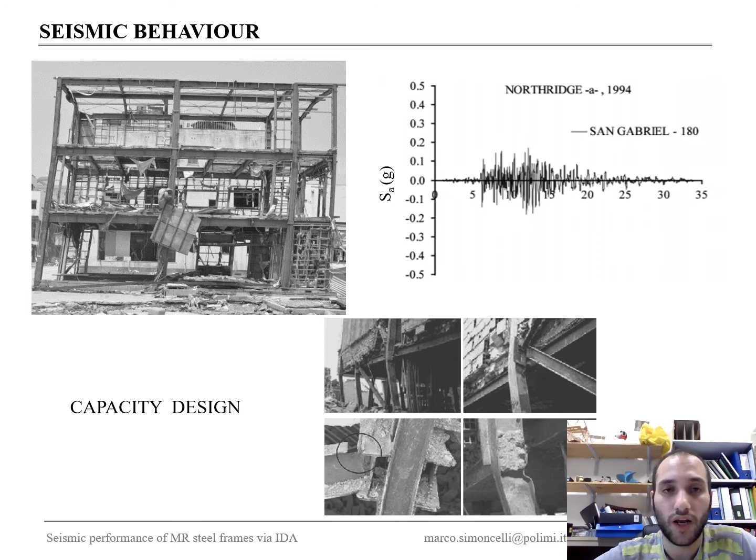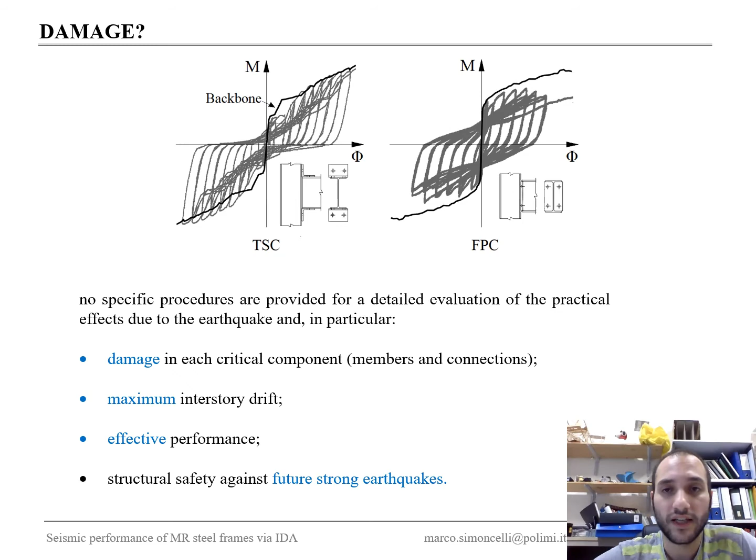The problem is also nowadays that the damage in the connection is not treated as deeply as the problem of the other members. So we need a procedure that is able to understand the development of the damage in the connection during the earthquake, and which gives us an idea of the situation of our steel frames after the earthquake. So for this reason, with this presentation, I introduce two concepts, that is damage estimation and residual load carrying capacity. The procedure herein presented is based on the incremental dynamic analysis.

The incremental dynamic analysis is a well-known procedure developed about 20 years ago and is based on time history analysis. On the base there is the running of several time history analyses with different signals, with different accelerations, by increasing each acceleration by a scale factor from 0.1 to infinite, theoretically. So, if you look at this flow chart, we started with these 44 earthquakes, and for each earthquake we increased the factor from 0.1 to 8 as maximum, until the collapse of the frame.

Collapse means instability of the frames, evaluated when the convergence of the analysis is not reached, because the frame in the software was modeled with plasticity in members and plasticity in joints. The new concept associated with the incremental dynamic analysis is the estimation of the residual drift, so not only the transient drift, the damage in the joints and in the elements, and the concept of the residual load carrying capacity.

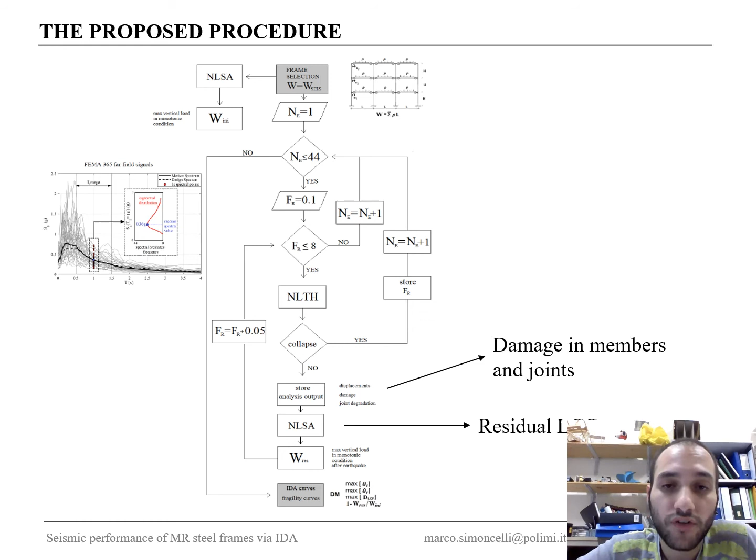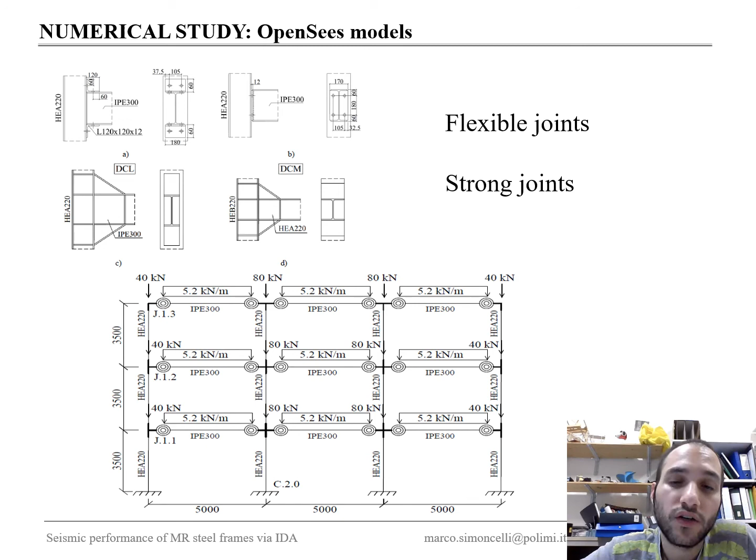This is the frame that was considered, 3 bay and 3 floor steel frames, and 4 cases were considered, 2 cases with quite flexible joints, and 2 cases with very strong joints, to see the differences between these two extreme situations. All the models were developed in the OpenSees software with second order effects, and all the joints and the nonlinear behavior were calibrated with experimental tests.

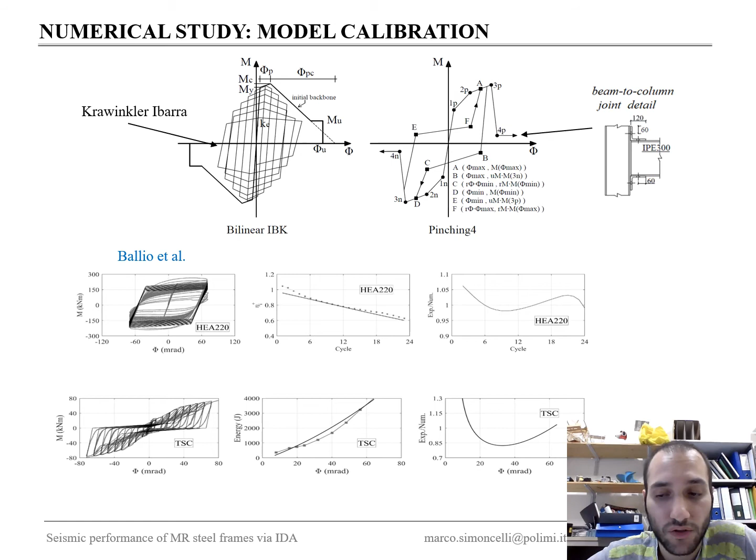So we started with the experimental cyclic tests of Ballio, and we calibrated the Krawinkler-Ibarra model for the members and the pinching models for the joints, especially the flexible joints. You can see here the very good agreement between experimental and numerical reproduction of the cyclic behavior of these elements.

For the damage estimation, the low cycle fatigue theory has been used. So the Miner rule combined with the rainflow method has been used to understand the accumulation of the damage cycle by cycle in the joints and elements. When the final value of damage is 0, it means no damage. When it is 1, it means full damage, so collapse of the element due to damage. This is the low cycle fatigue theory.

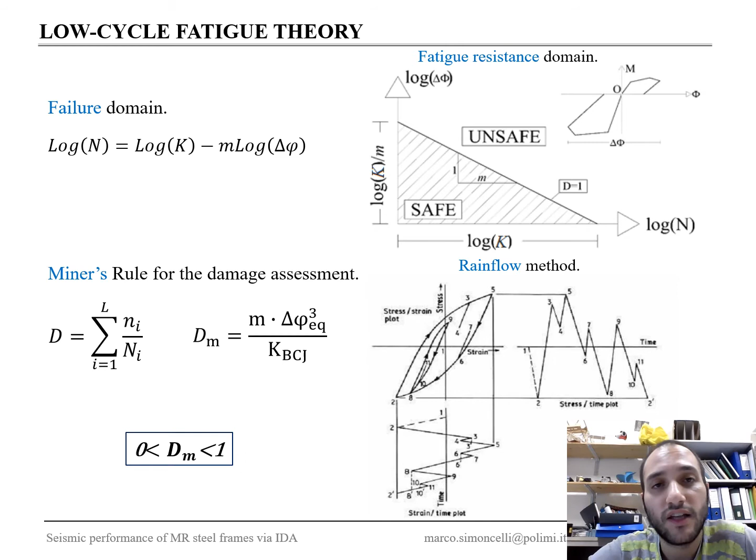Some results. With the application of all of these analyses, so a great number of analyses, we use the median values to understand the behavior. The first result is the representation of the transient and residual drift. We saw a very good agreement between the residual drift obtained numerically and the one estimated with the FEMA code.

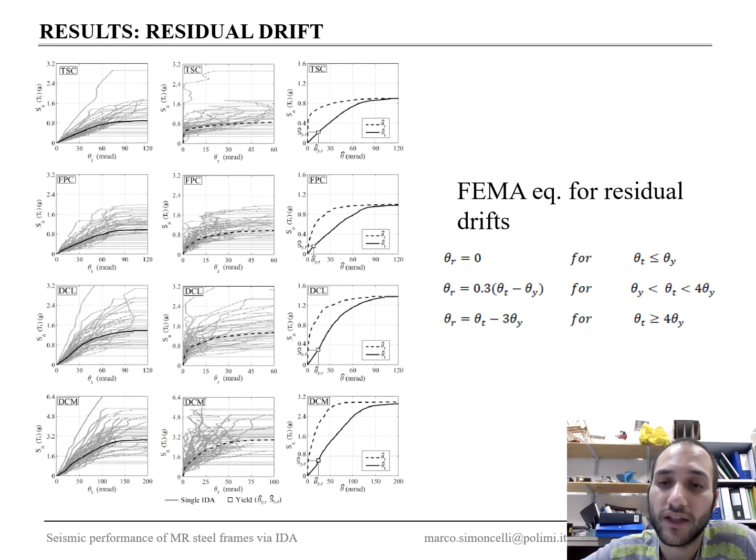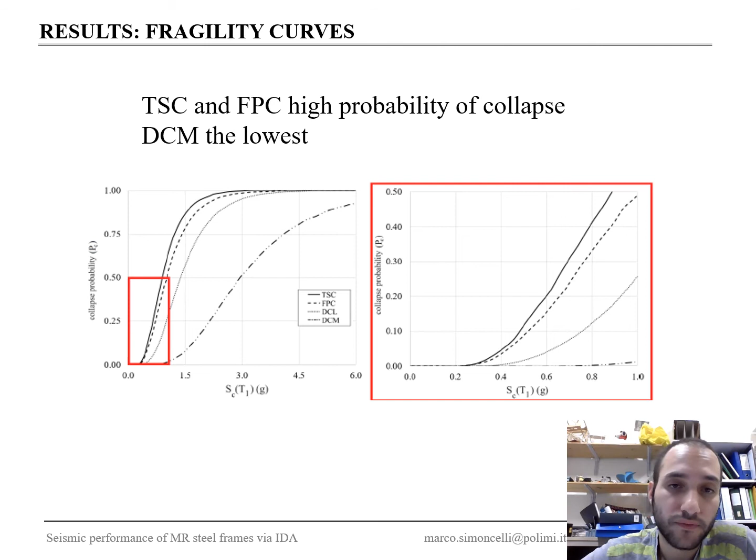The very important result is this one, the residual load carrying capacity. How is the residual load carrying capacity estimated? We performed an incremental nonlinear analysis before the earthquake, and we evaluated the maximum vertical load that brings to collapse. That is the load carrying capacity of the frame.

After each earthquake of the incremental dynamic procedure, we ran this nonlinear analysis again with the vertical forces. So we have the situation of the load with the undamaged frame, and we have the situation of the vertical load with the frame after the earthquake. The ratio between these two situations gives us the residual load carrying capacity.

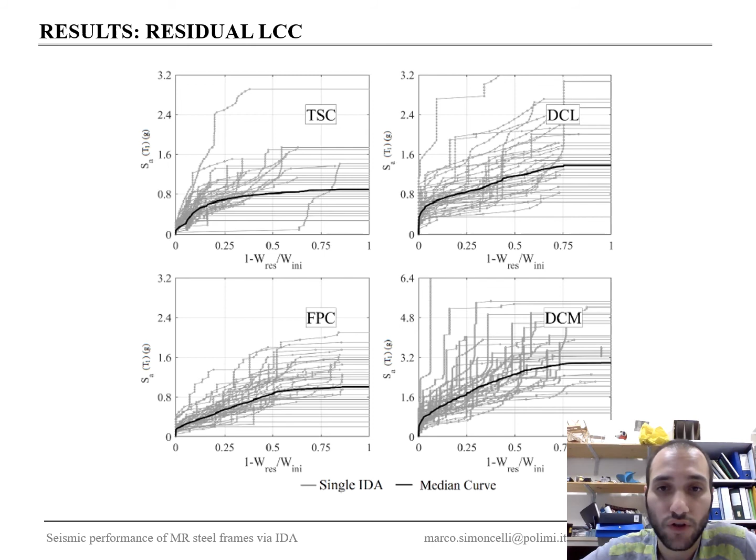That means if the DCM frame is subjected to an acceleration in the middle, like 2, we have a very big reduction of load carrying capacity, 2 times reduction of the load carrying capacity. We can also relate the load carrying capacity with the residual and with the transient drift. So it's really interesting to see how, by knowing the drift, we can know also what is the residual load carrying capacity of the frame.

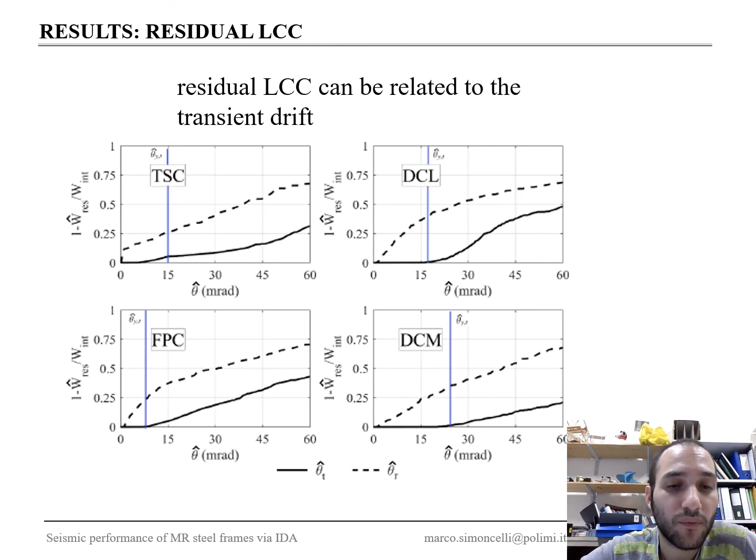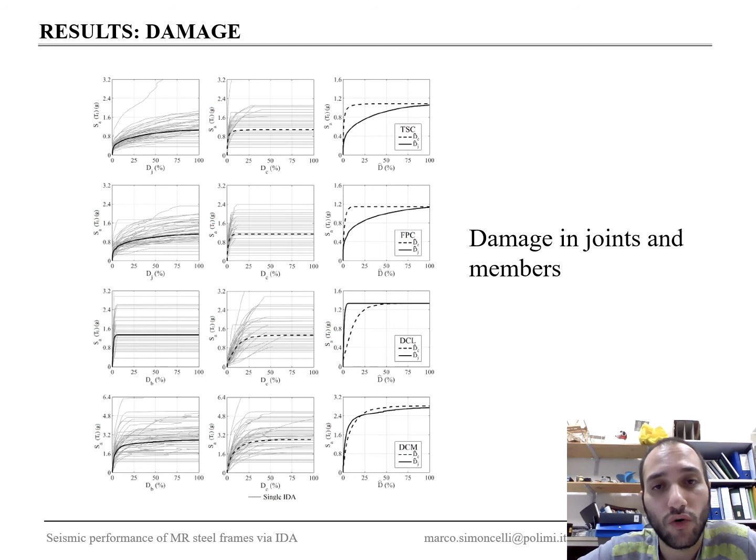Another result is the one related to the damage, and you can see the curve related to damage in joints and members, also relating the acceleration to the damage index. If we look, for example, at the interstory drift, how are these limits defined? They are the classical limits that you can find in the FEMA code.

The black one is the occupancy. Then we have the life safety. Then we have the collapse prevention. And they are associated to a specific transient drift. So we have the transient drift that gives us the limit, then we can relate the other parameters: the residual drift, the residual load carrying capacity, and the damage.

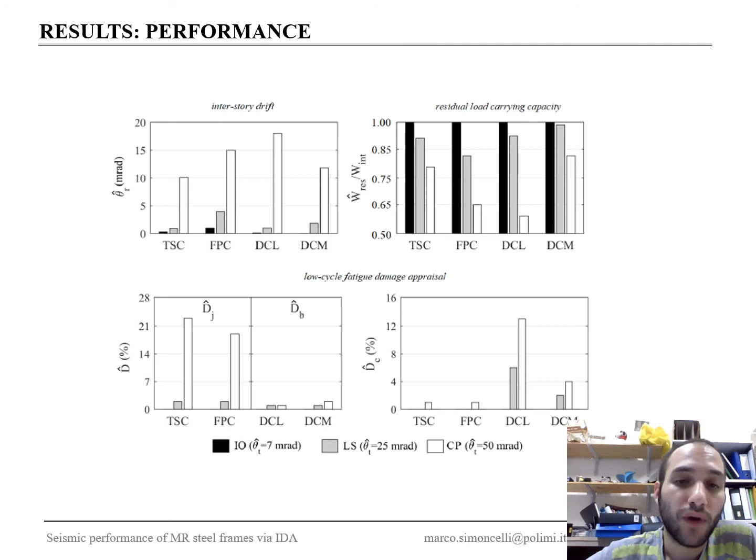For example, if we look at the damage on joint or damage on beam, dj and db, you can see that if we associate this damage level to the occupancy limit, we don't have damage at the occupancy limit. But if we look at the collapse prevention, you can see that in the joint we can reach 20% of damage as maximum.

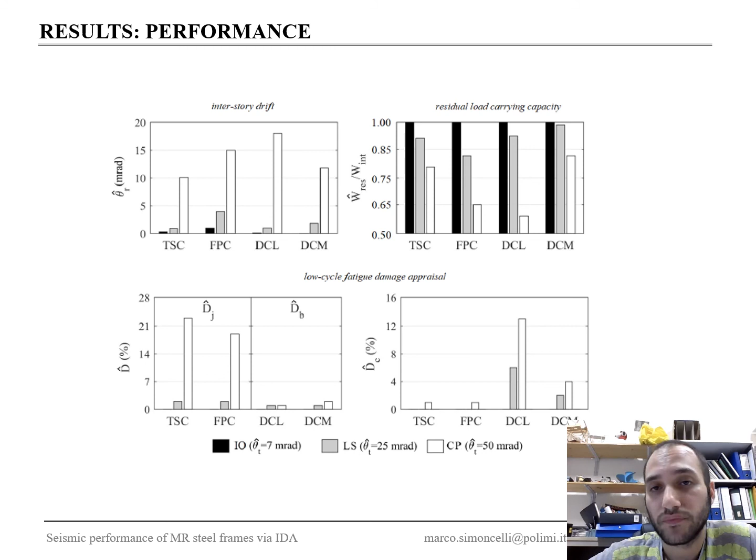Also, if we look at the residual load carrying capacity, you can see that at the occupancy level we don't have any reduction of load carrying capacity in all the frames. But if we look at the collapse prevention, you can see, depending on the frame, a very big reduction. We reach like 0.65, or 0.6.

So this procedure is not a new procedure because it's based on the IDA, a well-known procedure, but it can give us very important information on the intervention strategy, because we can relate the IDA with the damage in elements, so we can know what is the damage behavior and where the damages are in all of our elements. And we know what is the residual load carrying capacity after the earthquake. So maybe we can understand if that frame after the earthquake is safe or not.

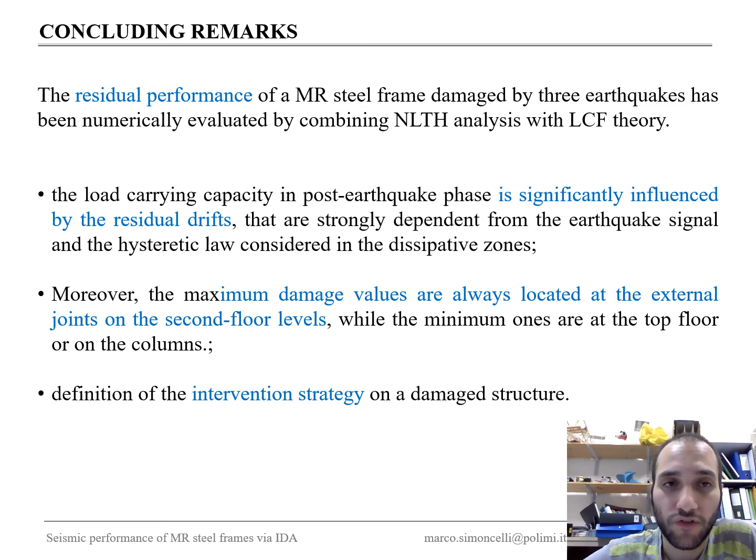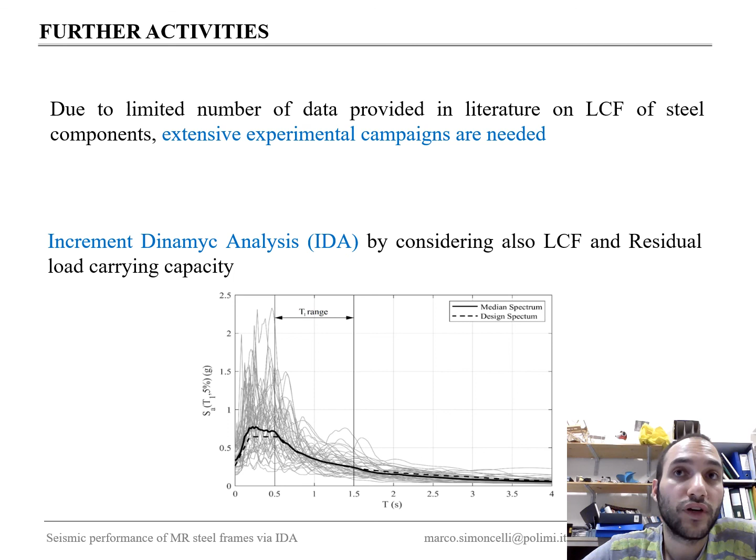And of course, we can also evaluate the residual drift, which can be evaluated numerically, like here, or by the use of the FEMA equation. The only problem with the low cycle fatigue theory is that for its calibration and use, we need to calibrate the curve of the Miner domain, and we need experimental tests. The experimental tests of elements and joints for fatigue are quite limited, so we don't have a lot of tests in literature. But we can overcome this limit by using numerical simulation, for example.